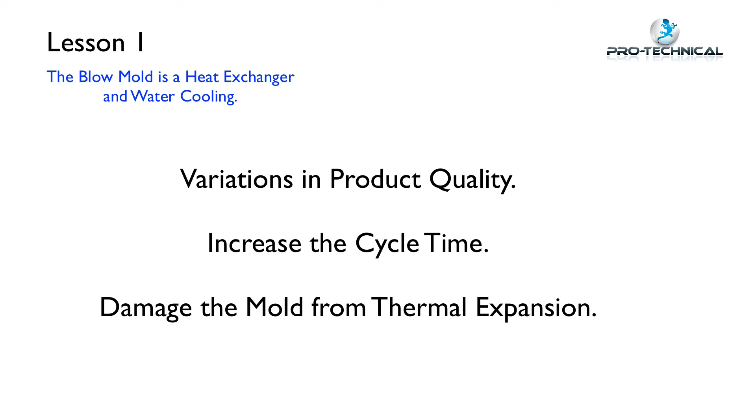This heat exchanging process for today's lesson is one of the most important lessons you will learn, and is why this lesson is at the very beginning of the program. And we'll cover two of the four most important control factors in moulding a bottle. So heat exchangers do exactly what their name suggests. They exchange heat in the process.

In our case, the mould removes heat from the plastic and transfers it into the water travelling through the mould. This needs to happen efficiently, otherwise our cycle time will suffer and the quality of the bottle will be variable. Hot spots in the mould will create thermal expansion and wear out mould parts prematurely. So how does it work and how does it happen efficiently?

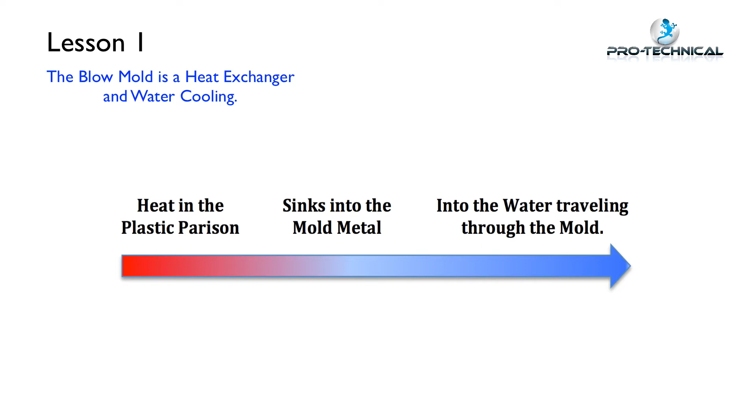In the moulding process we use high pressure air, let's say at around 100 psi, to hold the molten plastic parison, let's say at 180 degrees Celsius, against the mould cavity. Now the plastic must be firmly pressed against the wall of the cavity by the air pressure for the transfer of heat from the plastic to the mould, steel or aluminium, whatever the construction might be, and then into the water being supplied at around 60 psi pressure and at a temperature of 16 degrees Celsius.

Now only if all these steps occur with the right ingredients as I described, then we'll have efficient heat exchanging. If just one of these steps is compromised, then the heat exchanging process will break down and the quality of the bottle will suffer. The typical response to this sort of behaviour is to slow down the cycle time. Importantly, we will cover off the air pressure and parison melt temperature in other lessons. In this particular lesson, we're only going to look at the cooling water itself.

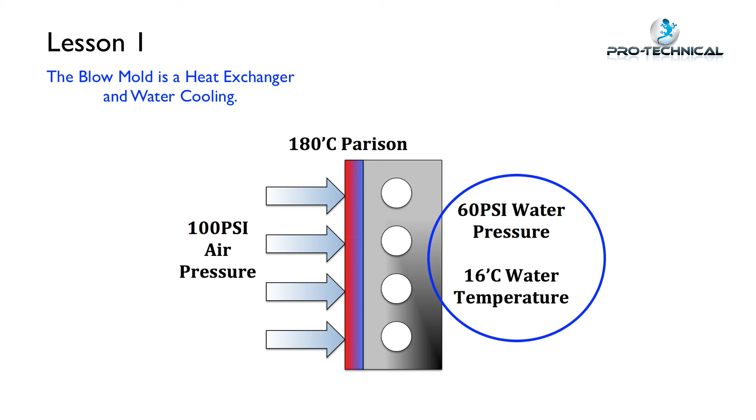So the most important phrase I have lived by for many years is pressure is the result of resistance to flow. And I'll say that again. Pressure is the result of resistance to flow. So this is basic hydraulics. So why is this so important? Well, water is basically lazy. It'll take the easiest way in any situation, and moulding is no different.

So if we do not supply enough water, that is the volume to the mould, then the pressure will not build up as a result of the resistance to flow. The water will just freely find its way through the mould, therefore we must supply more water than the mould can actually use. And I'll say that again, we always need to supply more water to the mould than it can actually use to create that pressure.

So what happens if the water volume is too low and the pressure is not there? Well, we get what's called preferential flow. The water will travel through the mould in any way that it has the least amount of effort, and this is much worse when we have multiple cavity moulds. So again, multiple cavity moulds use a lot more water than single cavities.

The water cooling channels will be filled with a combination of water and air pockets, which will move around the mould. The air pockets do not remove heat from the mould, and as a result the mould will heat up in locations where air pockets exist, and the water flowing without resistance does a very poor job of removing heat from the mould.

A typical response to an unknown flow situation is to reduce the water temperature to try and make the mould cold. This may give an impression of an improvement in the situation, however in reality what is happening is a combination of hot and cold spots in the mould is introducing stresses into the bottle. And this will cause instability in shrinkage. Sizing will also be incorrect.

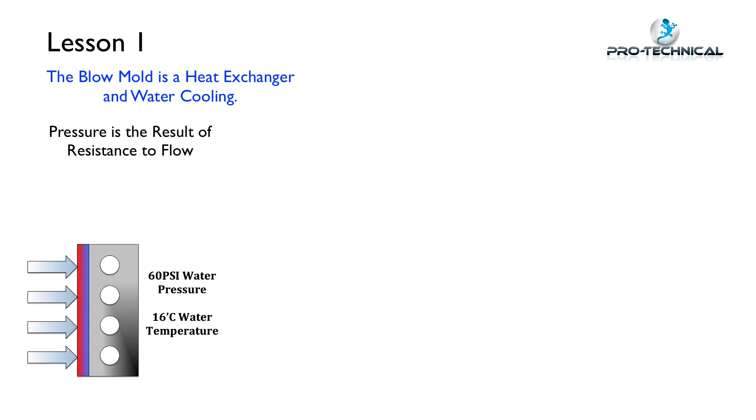So just while I'm discussing condensation, when this occurs, a typical corrective action is to partially close the water supply down to the mold. Now this is really bad as it changes the flow characteristics of the water and creates that preferential flow I was just talking about. So if you find yourself in this situation and you cannot run higher water temperatures, I suggest that you close down the outlet only. Now this will reduce the air pockets by keeping the channels pressurized.

So the most important step you must take now is to measure the water pressure coming into the mold and the water pressure coming out of the mold. So how you do this is equally important. Now creating restrictions in the water circuits with fittings etc. where you want to plug a gauge into, if the internal size is incorrect, will give you a false reading. This is basic hydraulics, so I suggest you read up on Bernoulli's principle on pressure and flow, and that's where I got the foundations for my learnings from.

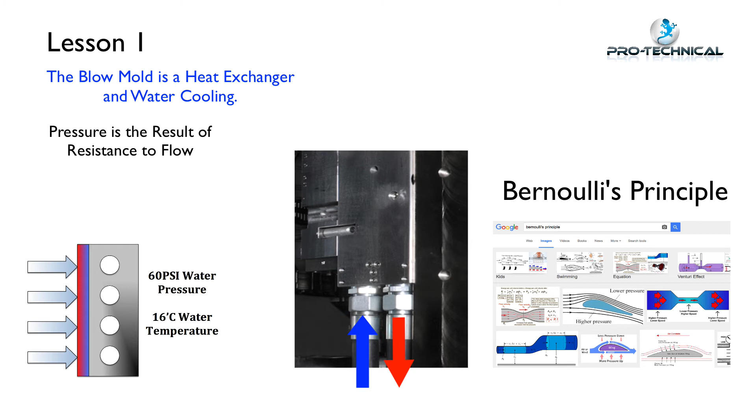So measuring the pressure coming into the mold will tell you if there is enough water volume coming to the mold. Remember, if there is not enough volume coming in, there will be very little pressure. So pressure is our guide here when we're looking at measuring the mold performance. So again, measuring the water pressure coming out of the mold after measuring the water coming in will tell you what's going on inside the mold and the pressure drop across the mold. So this will determine if the volume is correct.

Now a pressure drop is absolutely critical. If the pressure coming in and out of the mold is the same, then there is no flow. You actually need a pressure differential to create that flow and to get the water to actually move through the mold and carry away the heat. Again, that's coming back to that whole heat exchanging process.

So an example would be, if you have good inlet pressure, let's say 60 psi, and it's the same on the outlet, chances are there is a blockage further along the line. On the flip side, if the pressure is high on the inlet and very low on the outlet, that indicates that there is a restriction in the mold itself. Now this could be anything from poor design right through to a breakdown in the water circuit, or maybe even a combination of both.

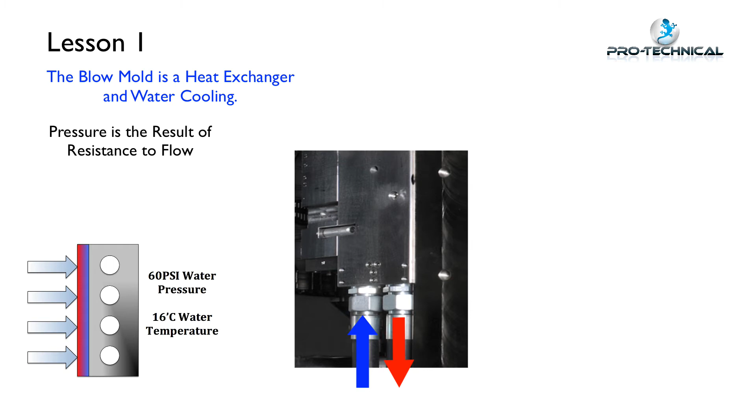So when I'm doing these tests, what I'm looking for is a number around 20 to 30 psi differential. I'll say that again, 20 to 30 psi differential. Now this indicates to me, from a lot of experience and a lot of experimenting, that the mold is being fed water correctly. And I have a preference for the supply at the mold to be 60 psi in almost every scenario. And again, this is all from my experience and experimenting. And if you see a pressure drop of less than 20 psi on the supply, you will get preferential flow.

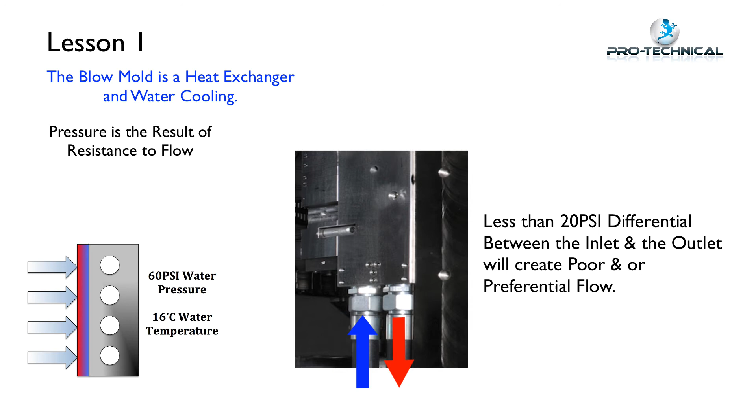So low pressure supply at the mold. Well, this typically means the mold can use more water than is being provided. So the mold is actually being starved. So in this case, I check the supply coming into the machine. I found to achieve 60 psi at the mold, I would need about 100 psi at the supply inlet to the machine. This will of course vary depending on machine size etc. However, it's a good rule of thumb and I've found it to work very well for me every single time.

If the supply at the back of your machine is low, say it's less than 60 psi, then I would go back and have a look at the pump system and see how it can be boosted, or if the pipe structure is too small and has restrictions as well. If the supply pressure is close to 100 psi, I then check the machine and the mold pipes, hoses, etc.

And look for any sizing or any restrictions with small pipes or fittings that may be restricting the flow somewhere. If the pipes and fittings are okay, then I'll open up the cooling system and look for blockages, working backwards from the mold. This is a very common problem. I have seen many manifolds, for example, completely blocked, and water fittings rusted and blocking the water flow entirely.

Finally, the last reason you may have an issue is the mold cooling is being shared with other features of the machine, like cooling of the hydraulics. If this is the case, then the only resolution for this particular issue is to increase the size of the pipe supplying your machine. Now let's look at a low pressure differential on our mold.

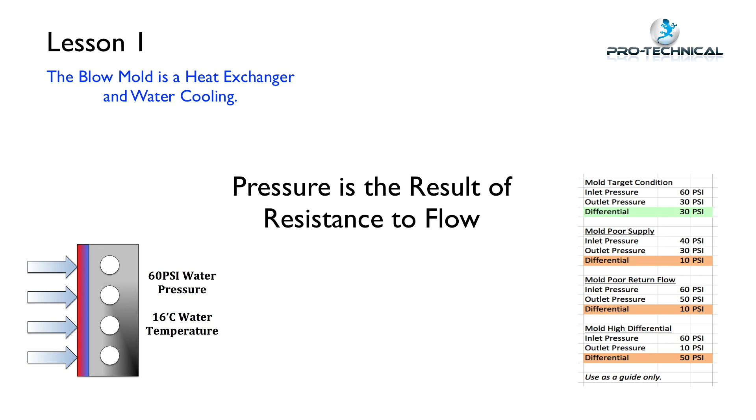Water temperature should not be lowered to compensate for poor supply. I recommend running between 12 and 16 degrees. What this means is, regardless of the weather conditions, I can run the same water flow and the same water temperature all year round. So your homework for today is to go out there and check your mould water circuits. Remember, when you're using a gauge to measure your pressure, don't restrict the water flow in any way, otherwise you will get a false reading.

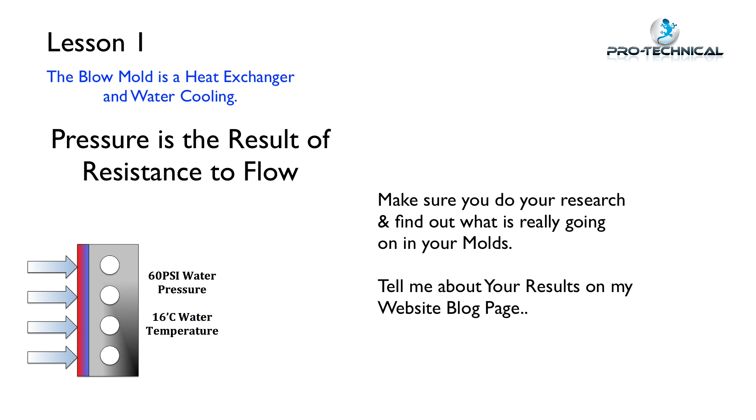But most importantly, never ever assume that it is okay. If you suspect it's okay, or you have an opinion that it's okay, that is not good enough. You need data to support what's going on. Okay, so looking forward to hearing from you. Make sure you go and check your mould water pressure.